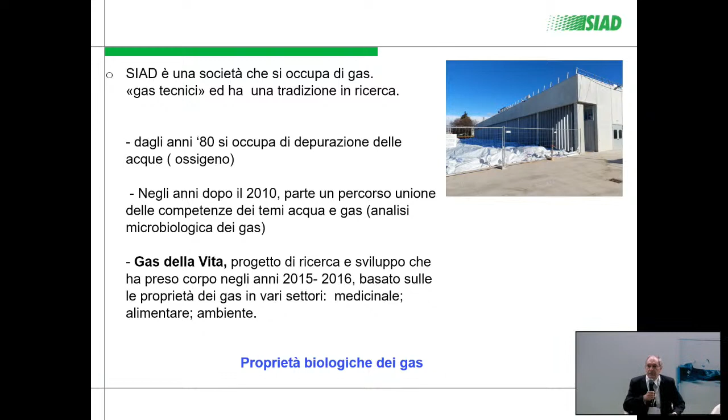H2S. And if life in its biological portion produces these gases, these gases are also capable of reversing the biological process to our benefit. There are other gases with a very important biological effect also on man. In 2015, 2016, SIAD started with a great investment to bring this concept of a gas of life into the fields of food, medicine, and environment. The environment sector is the one that concerns us today.

So expressing this concept, a lot of things may come to your mind, but I mentioned four gases, not only oxygen. If we were able to imbalance these gases in the biological process, apparently we are able to modify the bacteria to our benefit. So the biological process may not be the same as the one we know now. This is a research process that SIAD has started and will continue.

And let's talk about the holistic approach. That is a term that has been abused, meaning let's deal with everything, combining competences. But let's face it this way. I remember I chose to introduce this holistic term about 40 years ago, or even before. I had a big volume to read, the acts of the Vienna process.

The afternoon was very hot, and I decided to read even the premise, the introduction. The introduction had been written by a scientist and philosopher. And the first words were: these are the acts of the process of Vienna, talking about wastewater purification technologies. Are you sure you want to purify wastewaters?

And there was also the concept of the various systems, of the various environments. If you do something, you may pass from gas to liquid, and vice versa. Are you ready to do that? That premise was quite impactful, and you would not expect it in the acts of a congress. But this premise remained in my mind, combining the first slide with this one we had the opportunity to hear.

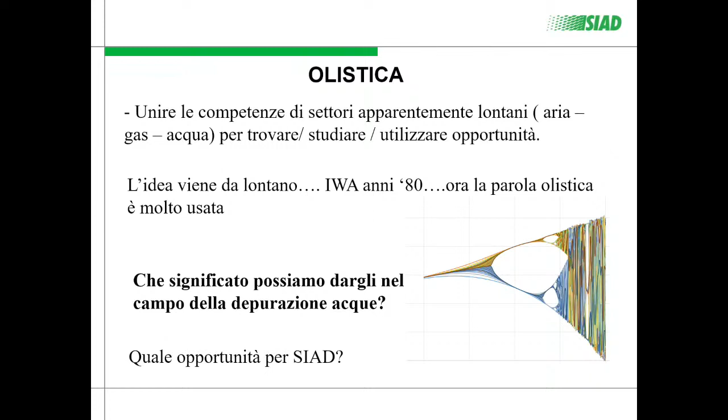So, combining the first slide to the second slide, we have this big opportunity to do it with PerFORM Water. When I was told by Mrs. Bazinet on the occasion of this big project, PerFORM Water, I said, well, that's good, but we can do it with a great effort. Following this idea, not only wastewater purification, but let's consider it as a whole with the strengths we have. And then 5 topics came out, and then these were reduced to 4.

That was a big effort for SIAD, but we decided to do it all the same. And we started this pathway in PerFORM Water that you will hear this afternoon. These concepts went along, and we all know that we talk about environmental footprint, environmental impact, but anytime I hear about them, they are smaller indeed, because it is the environmental impact of the wastewater treatment plant, of the building, and it's quite difficult to get out of this field.

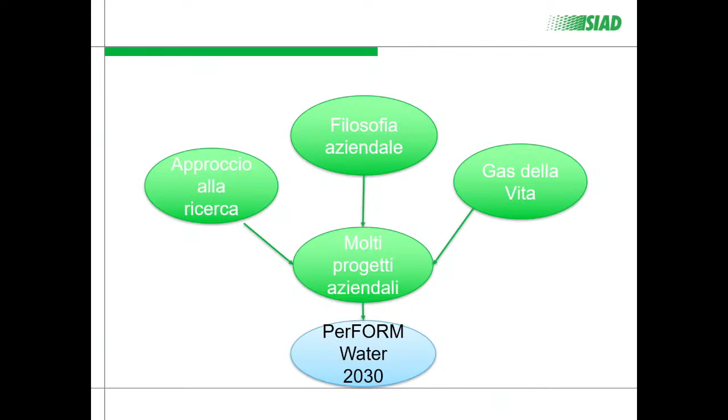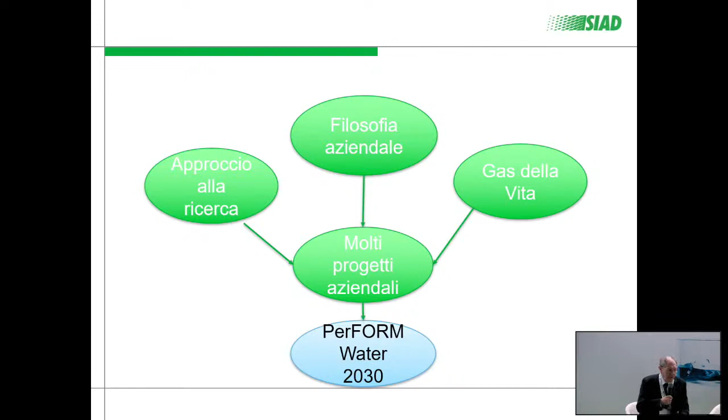And among the various company projects, we will focus on PerFORM Water, because there are many other company projects. PerFORM Water could start with the techniques, meaning having just a technical approach, so to see how much oxygen differs in the biological process tank. But we have to make an effort in not focusing on the usual issues and topics that are, of course, important.

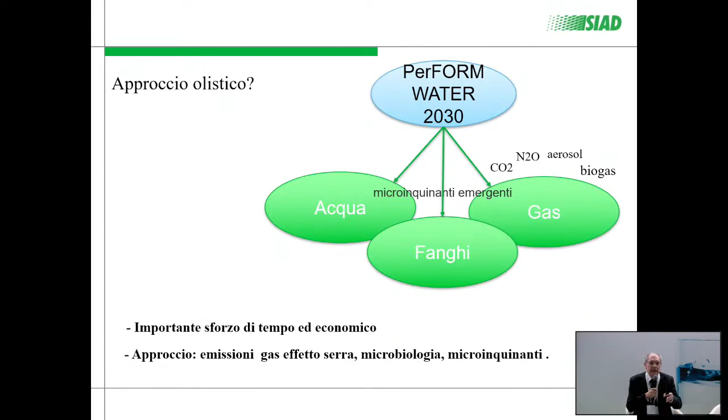The wastewater treatment plant also includes greenhouse gases, about 100 kilos per day. Is it something on which we can intervene or not? So everyone will then give their own answers. But today and tomorrow, this kind of data will be presented to you. So to measure a parameter does not mean that there must be something wrong. It's just measuring from a scientific point of view. So I want to know it, and then I will evaluate whether it's important or not. It's not that I measure because I know there is a problem there, but I measure it because I don't know very much about that parameter.

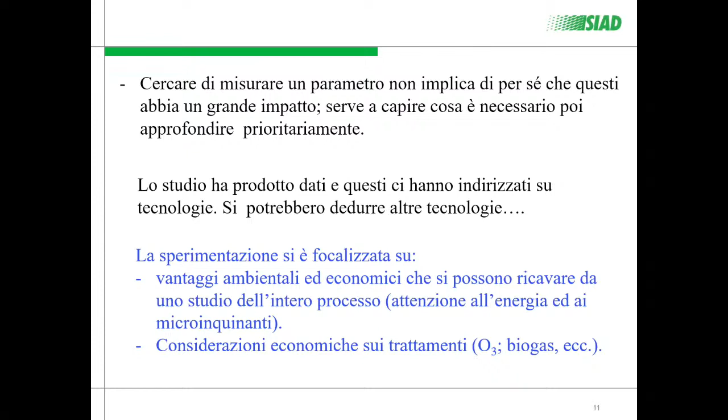So did we do philosophy with PerFORM Water? Not so much, because we have obtained quite important results. And also with respect to energy, the overall energy of the system, the holistic energy of the system, which remains a guiding parameter. So if you have energy that you may use in a favorable way, your process will be successful. Whereas if energy is unfavorable in your process, but you're able to do it because you have the funds, that could be good for 2 or 3 years, but then it's going to die out. It's going to finish.

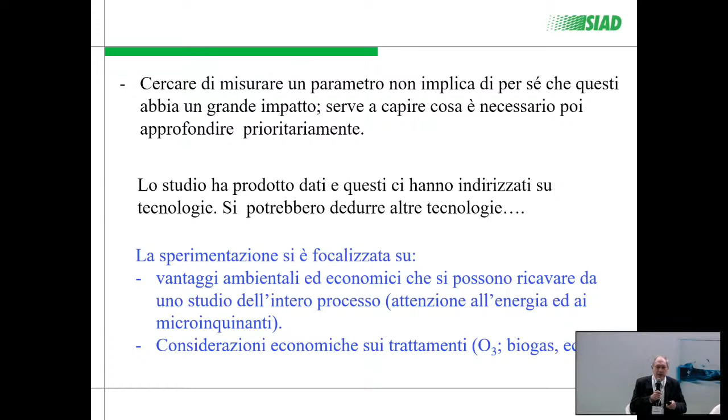So holistic is a concept that we should maintain throughout the processes. And of course, those who will read 384 pages of those European Commission guidelines may start understanding, fully being aware of these aspects. The real energy impact of your company will then be known to you.

At this point, I finish, and I just would like to remind you the concept of gas of life and the fact that PerFORM Water has been a big project, not only for SIAD, but as a whole, because also in the initial edition, it was an integrated project. Integrated means even more integrated now, but PerFORM Water went towards the right direction. We just need to be brave enough or to be willing to widen it.

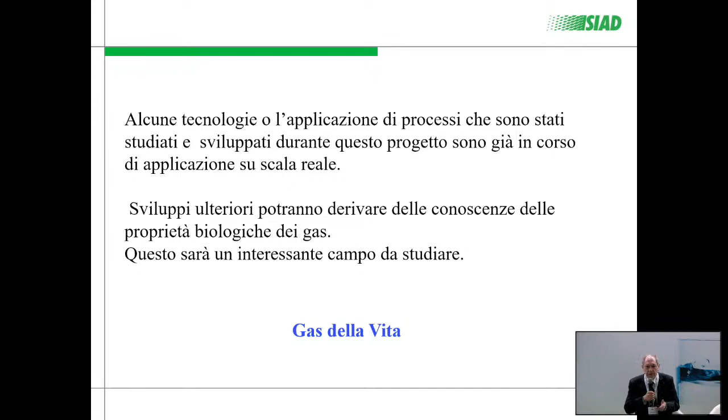And this morning we have heard about circular economy. And an interesting communication is this, that circular is not painless, because circular energy actually moves energy from upward to downward, moving activities and money. And so what becomes more important is indeed the companies located downhill rather than uphill. So it is like a transfer of energy.

So the word energy comes about again, but we need to know what this transfer is about. So the big company at the top of the supply chain may not be so powerful anymore, because the power will be transferred to downhill companies. And then let's consider the definition of gas of life, but also in wastewater purification, gas of life means gas having an impact on our life, on the biological composition of wastewaters in all their parts.

And then I leave the floor to following presenters who will tell us about what we have obtained. So no more philosophy so far, but the direction should be fully understood, and why SIAD has started PerFORM Water with such a big effort, covering 3 fields and not only one. I hope I conveyed this message to you.

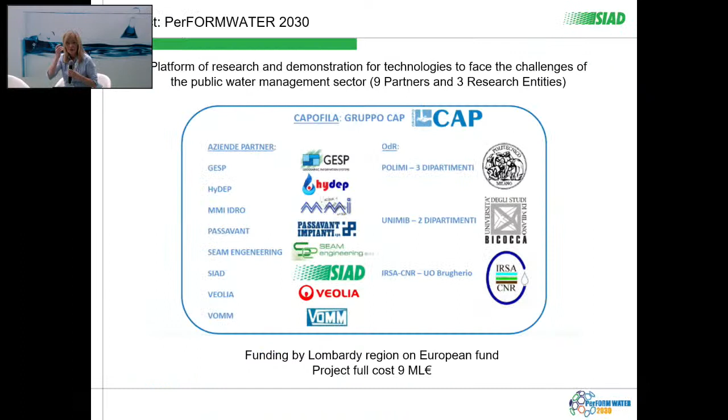So this slide lists the partners taking part in PerFORM Water. One is the Gruppo Cap that this morning was involved in presenting the whole project. We play a small part in the whole project. 3 research institutes, IRSA, the 2 universities, one of them being Bicocca University.

We couldn't cooperate with them. We cooperated with Politecnico because it is the scientific reference for the project, but we also carried out field tests and experiments. So PerFORM Water is a research and demonstration platform for technologies aimed at facing the challenges of the public water management sector. The project has been funded by Lombardy authorities and EU authorities, and the financing amounted to approximately 9 million euros.

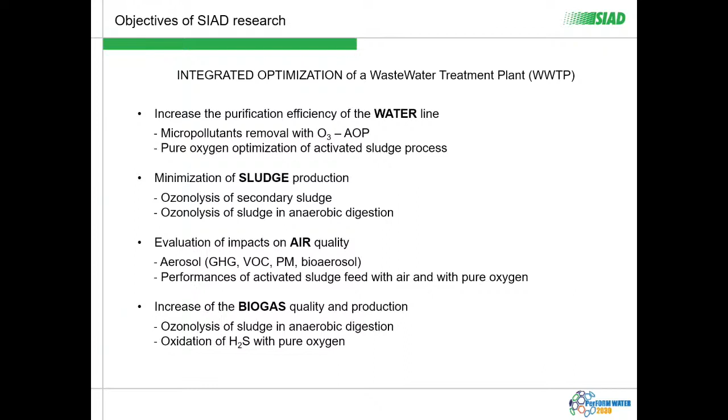As for the water line, we considered the possibility to optimize the treatment process with reference to micropollutants by using ozone. We assessed the oxygen purification process, so we're talking about activated sludge. And we also assessed the possibility to reduce the production of sludge, which is a tricky issue when it comes to plants. It also has economic consequences.

We analyzed 2 processes of ozonolysis on activated sludge with pure oxygen, and the other process in the anaerobic digestion phase. So one on the water line and one on the sludge line.

Another topic that offered a lot of challenges was to assess different processes of pollutant removal from the viewpoint of the impact on the surrounding environment. So we heard about this topic during the morning session, and sometimes we did not agree totally on this.

Assessment of air quality was only done by assessing aerosol until some years ago. So the analysis was carried out in the surrounding areas, the areas surrounding the plants.

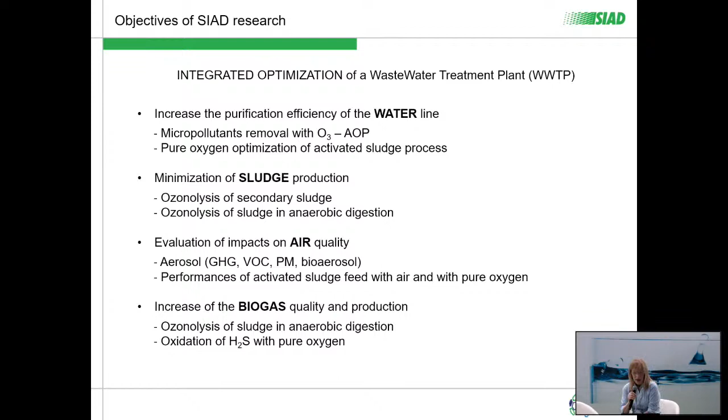This constitutes a challenge to assess the overall emissions, aerosol emissions produced by water treatment plants, not only from the biological department, so we consider the aerosol, VOC, and other gas emissions. So we tried to do this by assessing the diversified evaluation of plants like the one we worked in, compared to oxygen pure-fed tanks where there's no excess nitrogen component.

As for anaerobic digestion, since the objective was to reduce sludge production, we wondered how we could reduce it by incrementing and increasing the biogas yield and improving the biogas quality. This relates to the second topic I've mentioned, the reduction of sludge.

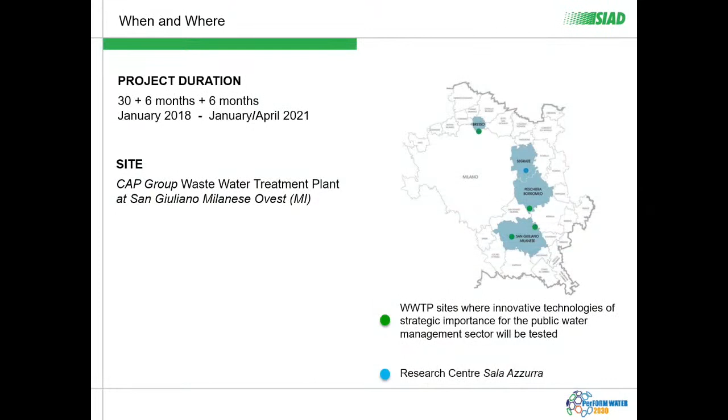We have carried out this activity in the plants made available for us, different plants, the ones you can see on this map, the green ones. The plant we worked in is located in San Giuliano Milanese West, and it has lasted for 4 years, quite a long period.

So we indicate 30 plus 6 plus 6. The first 6-month period derives from the fact that many partners asked to continue some projects, some activities, because some of them were late at the beginning, delayed because of problems that were later on solved. But in any case, the schedule was a little bit delayed.

The second 6-month period was caused by the pandemic period that slowed down the activities and also changed some conditions in comparison with the start of the project. So you can see the image of the plant I've just mentioned, an aerial view.

The different arrows show the different spots, different areas of the plant we have worked in. I'm not going too much into detail in this, but this gives you an overview of the different sectors and processes we worked in.

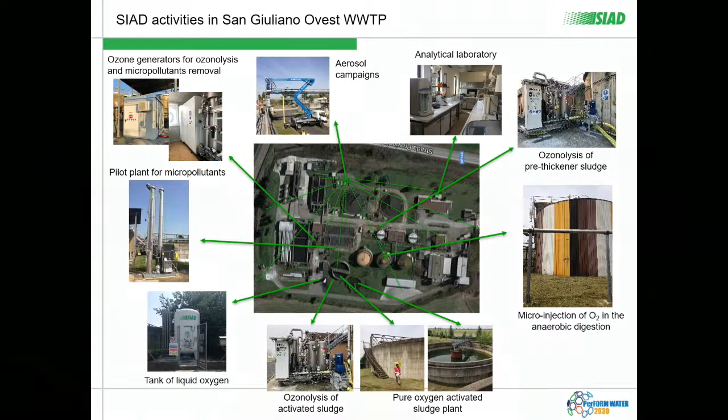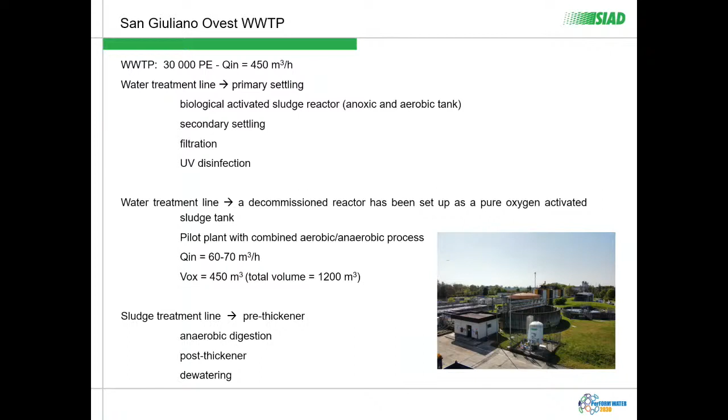I want now to thank CAP Group, not just because they supported us so well, but also because they made a laboratory available in the plant, and this was very useful because it enabled us to work directly in the plant. This was really helpful because in some sample harvesting campaigns, we were able to analyze the samples right there. So this facilitated the analysis campaign.

You see that the flow rate equals to 30,000 citizen equivalent of the biological activity sludge reactor, anoxic and aerobic tank. This is for the primary settling, and the secondary settling, and tertiary. We have filtration and UV disinfection.

As for the sludge treatment line, we have a pre-thickener, anaerobic digestion, post-thickener, and dewatering. And in the middle, there is a part related to the revamping of a tank that hadn't been used for years. It was made available for us to create the pilot scale plant, fueled and fed by activated sludge using pure oxygen.

We would treat a part of the incoming water, 450 cubic meters, and we would treat 70 cubic meters per hour, even though the output was not directed to the final receptor, but sent back to the plant, because we were not allowed to discharge the output water. The request was to reach the highest and best quality of results, because we had to compare these results with the real plant, so the performance had to be comparable to the one of the real plant.

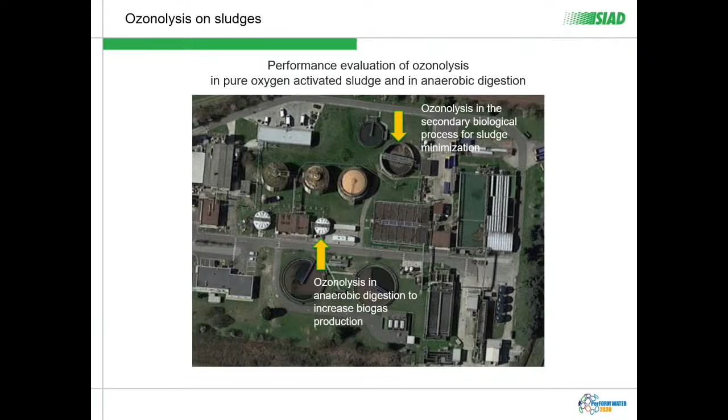Now, I would like to offer you a brief overview, some food for thought, so that you can see the four topics, and the other speakers will provide you with more details.

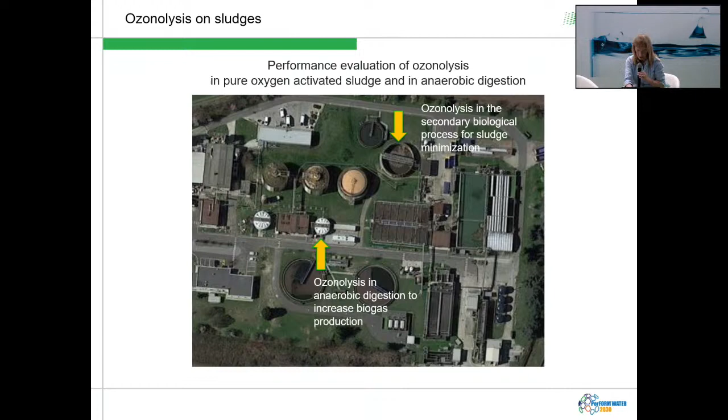So we evaluated the ozone performance in reducing sludge on the secondary and on anaerobic digestion. This speech and the following one - I added this part here because this gives me the chance to provide some information for tomorrow's participants who are not here today, as for using ozone to reduce sludge yields in the secondary process.

Based on activated sludges, you see the experimental plan results, and details in red and green color are indicated. Different periods when the plant used and didn't use the ozone - so before and after. The plan was to have 2 cycles for conditions, but it was not possible.

The other important thing was to evaluate the plant functioning in different temperatures, especially when it comes to nitrification, because it's very sensitive to temperature changes. So we needed to evaluate the effect of ozonolysis on nitrification in winter and in summertime.

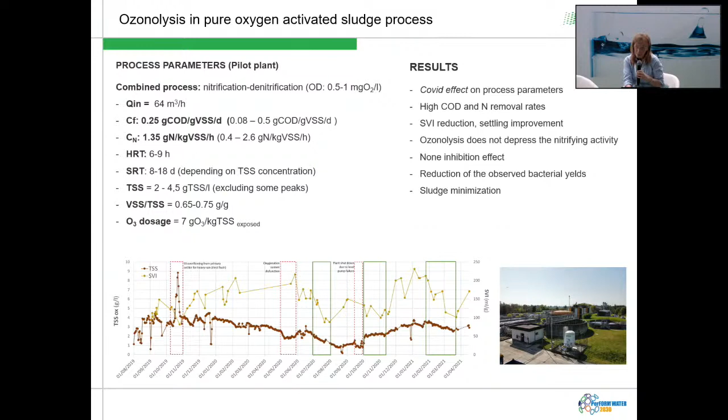We evaluated, taking different viewpoints, that ozone could not influence the biological process, not interfering with the regular standard biological activity, with particular reference to nitrification. So overall, no inhibition effect was recorded. We're not saying something unoriginal, that the cellular growth rate was lower - it was so, and we also attained the reduction of sludge production.

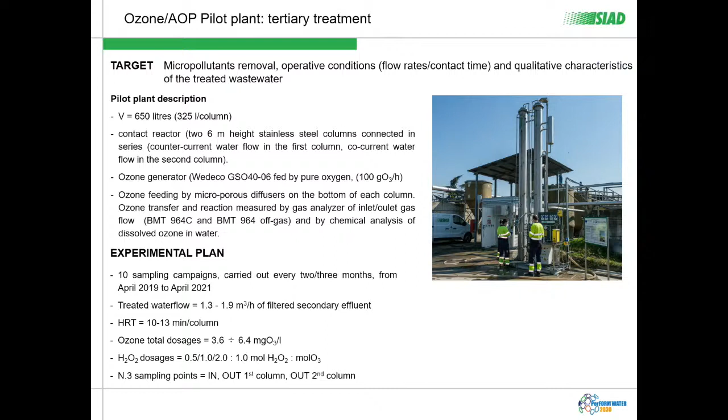As for the tertiary treatment with ozone to remove micropollutants, we designed, installed and managed this pilot plant, 2 columns, 6 meters high, overall volume 650 liters, 325 liters per column. We used pure oxygen from the bottom with a porous disc.

This activity lasted for over 1 year, 10 sampling campaigns lasting 2 or 3 days in a row in the operating plant, and the treated water was the one coming from the filtering.

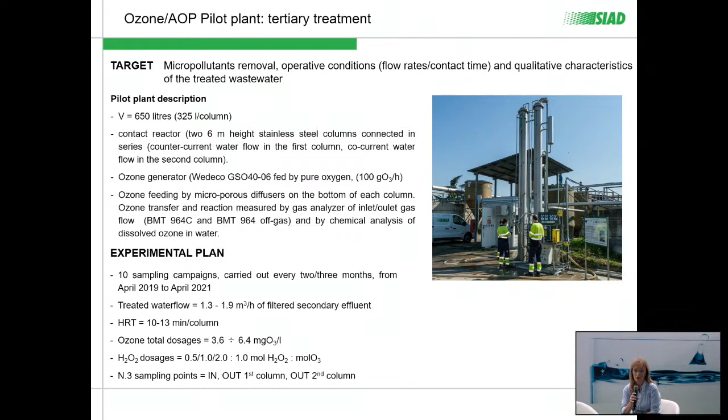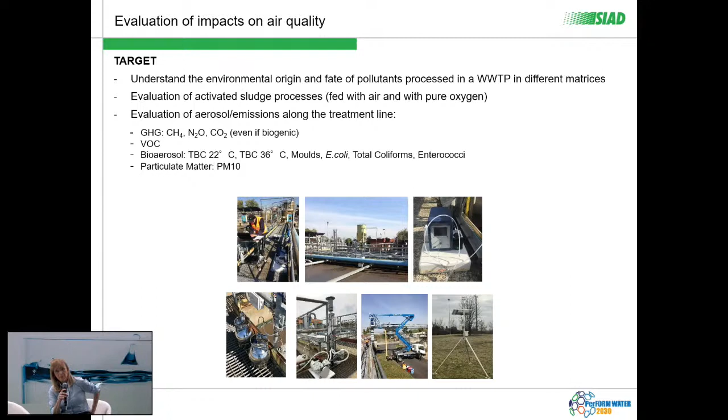As for the evaluation of the impact in terms of aerosols of the water treatment process, I have mentioned the parameters we considered to try and achieve an overall balance. We didn't succeed completely because we achieved a lot of results, but also many doubts and questions still to be answered. But this is what research is about: finding confirmation of hypotheses, but also continuing experiments and research.

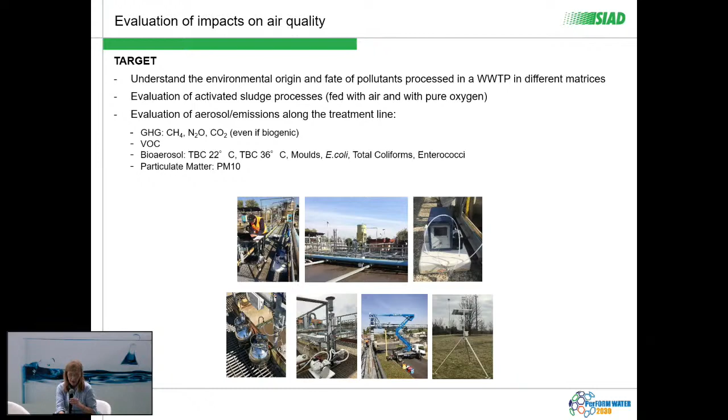There are some pictures in this slide representing the sampling system we have used at the moment. The experimental plan may seem difficult to describe because it seems boring to say that we have harvested samples at the beginning of the process, at the end. I'm not going to describe all the biological, oxygen biological process and so on and so forth, but

I had the chance to talk to partners during the lunch break. We said that the volume, the amount of results we have attained is really extraordinary, and data still need to be processed and evaluated, and most of the activities have been completed, but it is also true that results can be interpreted in many ways from different viewpoints.

So one individual result can bring about many other results if seen from different viewpoints. So this means that we are going to continue our activity, our research.

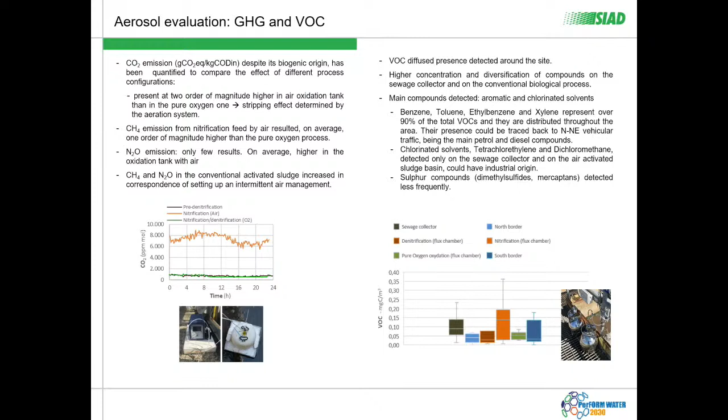I would say the pivotal point referred to nitrous oxide and methane in alternated cycles of oxidation. From a certain viewpoint, in an air-fed oxidation tank, we provide oxygen to a certain level, then oxidation stops and the oxygen level goes down to a minimum set point, and then it starts again.

During this phase, anoxic phases develop, favoring the release of, for instance, greenhouse gases. So maybe we are talking about meaningful or non-meaningful mass figures. What's their value?

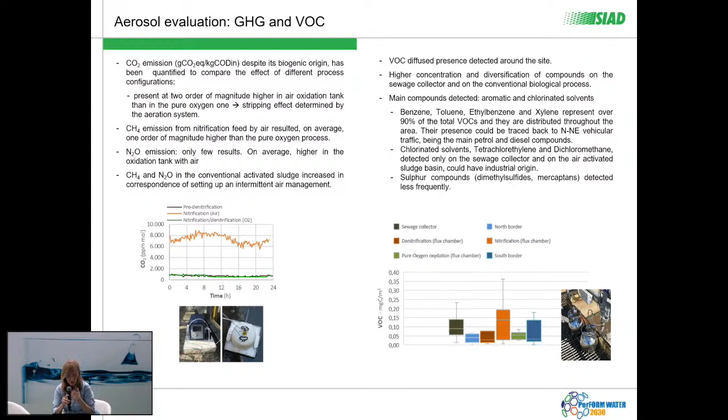As for the biological tanks, the evaluation of greenhouse gases was made using a flux chamber to funnel the outgoing gases to evaluate their amount released in the air, as with the VOC. They come from the sewage collector, and to a lesser extent, the tanks.

We identified chloride-based pollutants, aromatic pollutants in different concentration levels that will be better described in tomorrow's presentation.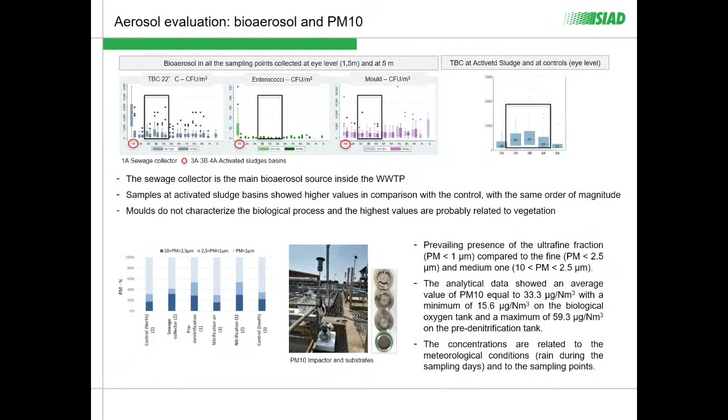As for the bioaerosol, we have evaluated different parameters, and something that was new to us in this project was to assess the presence of bioaerosol gases at man's height, but also in the atmosphere. We wanted to see whether these matters are still present at 5-meter height or not.

Obviously, the answer was it depends on the conditions: wind, the position, if it's sunny or not, so the conditions of the surrounding environment. I am smiling, but this is how things stand, this is exactly what happened. So we use different parameters for the bacterial count and pathogens.

The main evidence that emerged was that a critical point in the plant is the sewage collector, which can be anticipated, and the biological processing tanks showed results and values that can be found also in the literature, with small differences between oxygen, pure oxygen, and activated sludge tanks. The two blocks of right and left are the two control ones.

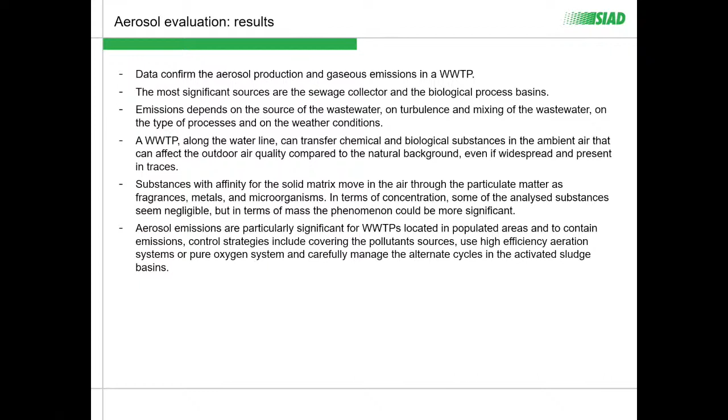and also the concentrations depended on the conditions, the weather when samples were taken, and in the particulate we identified the presence of a fragrance. So this is something worth noticing. And I have synthesized the results. This slide wraps up what I have said. So this is a synthesis of all of the activities.

Just to recap with some figures, the results of our activities on anaerobic digestion. You see also important figures. So you have the increase in biogas, which is quite important. Some are in real scale and some in lab scale, with sludge minimization and a significant reduction of H2S.

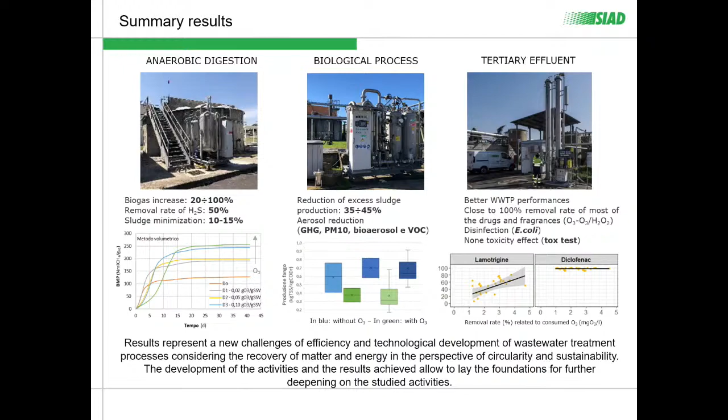With regard to the biological process, indeed the ozone releases allowed us to significantly reduce sludge production and the possibility of containing aerosol, with reduction of those four parameters. And concerning the tertiary effluent, for the reduction of micropollutants, ozone allowed us to obtain 100% removal rate of most contaminants. Some were ozone refractory, but it was possible to obtain higher yields with ozone, from 20 to 80, and something more with the implementation of

peroxide. And an important thing, with regard to ozone treatment and especially for tertiary effluent treatment, we evaluated the toxicity percentage. We said that this morning. Not all substances can be transformed into CO2 and water. For us, it's important to understand whether ozone treatment may lead to formation of undesired products that normally would not be taken into account. So we have faced this aspect, measured toxicity tests as required by the regulations, but also mutagenesis tests.

Then I really feel like thanking everybody, all the people who collaborated with us, all of the partners of our company and all of the colleagues. We also would like to remember our colleague Alessandro, who passed away last year. Thank you very much.

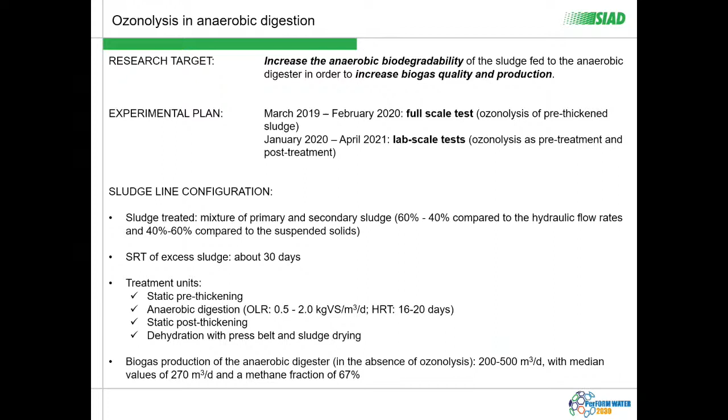So the San Giuliano West plant in the sludge line configuration treats a mixture of primary and secondary sludge, 60% primary and 40% secondary sludge as regards hydraulic flow rates, so 40 and 60 compared to the suspended solids content. And so the SRT of excess sludge is about 30 days. Treatment units were already presented by Eleonora. So pre-thickening, anaerobic digester, post-thickening, dehydration, and sludge drying.

So a note on the anaerobic digester. This was operated with a very variable load during testing, from 0.5 to 2 kilos of volatile solids per cubic meter per day, with an HRT from 16 to 20 days. The digestion plant, in the absence of ozonizers, would have median values, because the median is a more representative value, of about 300 cubic meters per day with a methane fraction of 67%.

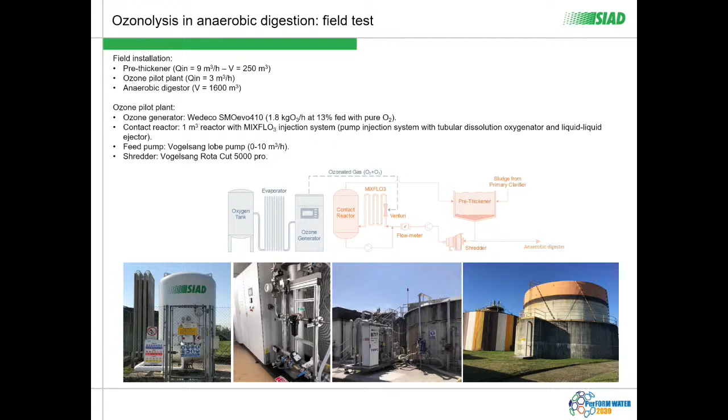So then the field test included the installation of a contact reactor next to the pre-thickener, and the sludge coming out of the pre-thickener was fed to the contact reactor and then to the thickener itself. Substantially, we created an internal recirculation in the pre-thickener, and in future we want to treat the blend, but in this phase we did not rely on the security of this, so we treated the sludge in the pre-thickener that was then fed to the anaerobic digester.

You see the various parts of the plant, pure oxygen feeding ozone generators, sending the gas to the contact reactor. There was a recirculation within the pre-thickener, and then the treated sludge was sent to the anaerobic digester.

So the characteristics of the sludge being treated, without dealing with individual figures, but just to tell you that sludge had a total solid content of 22 grams per liter with a total volatile fraction of 63%. Soluble COD was 300 milligrams per liter, and total organic nitrogen was 1,000 milligrams per liter, of which 35 were dissolved in the supernatant. The supernatant was detecting a content of volatile fatty acids of 352, and then protein and carbohydrates 3,000 and 7,000 milligrams per liter as a whole, but in the dissolved portion 5 milligrams per liter for carbohydrates and 75 milligrams per liter for proteins.

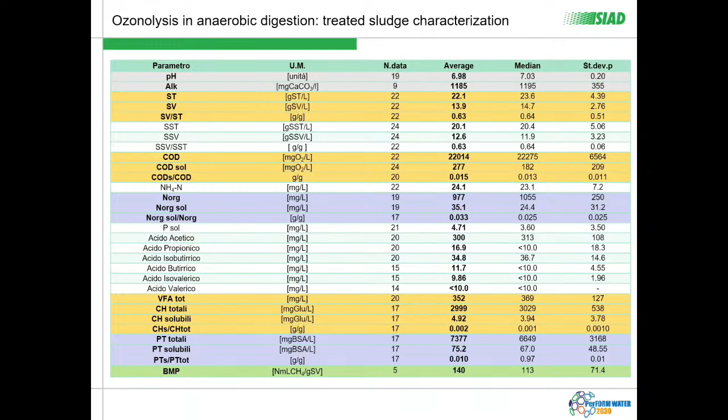Finally, in green, the BMP, that is a test measuring the biochemical methane potential of a sludge, expressed in milliliters of methane per gram of volatile solids. And the sludge at the entry of the pre-thickener had a value of 140 milliliters per gram. That is quite low, but very variable. The variation coefficient was equal to 50%. So it could be either 70 or 210.

So how much ozone have we dosed? If we refer to the gas flow rate to the pre-thickener, the dosed ozone was from 2 to 10 grams of ozone per kilogram of volatile solids. If we refer just to the contact reactor, where we treated a lower flow rate to the pre-thickener, this dosage changed from 10 to 40.

So from a certain point of view, having treated a lower portion allowed us to also evaluate the performances and yields at different dosages: a low dosage at the pre-thickener and another one calculated only at the contact reactor. So, something about the pre-thickener: the pre-thickener has a contact time of 1 day.

Arianna was telling us this morning that the disadvantageous element is that by treating that sludge, we actually give oxygen to the sludge, not only ozone. And this oxygen may determine the starting of aerobic processes, consuming substances you would like to keep for anaerobic digestion. So it is a kind of vicious cycle.

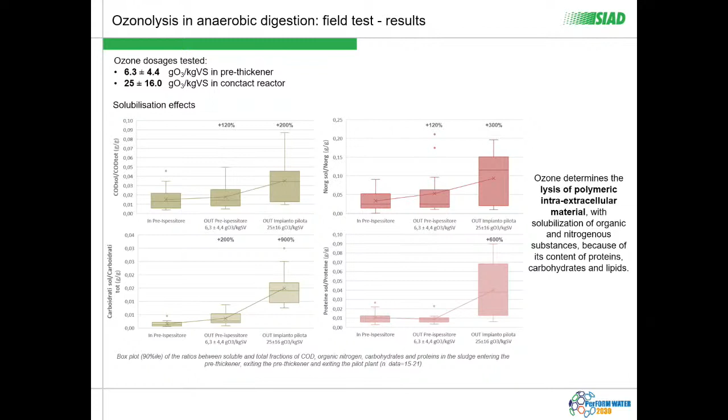In these graphs, we had to make a statistical analysis of data because sludge characteristics underwent a strong variability during testing. And during testing, we encountered several difficulties from an operational point of view and also with respect to the plants. We will see some pictures then, just to confirm that reality is much different from the lab scale. So full scale is different than lab scale. We have indeed perceived this.

From these diagrams, you see the pre-treatment chain: incoming into the pre-thickener, the outcome from the pre-thickener, and then the output from the pilot plant. So what does ozone do? It dissolves organic and nitrogen material and makes it available to the anaerobic treatment that occurs downstream. So the ozone's task is to make available a substance that otherwise would not be available.

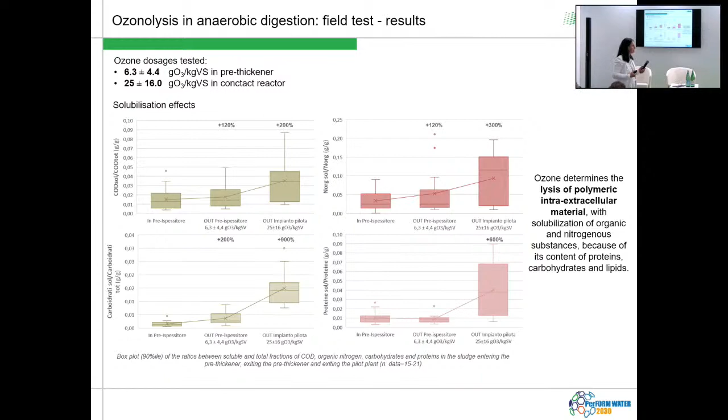In particular, what we see in the diagram on the top left is the increase in the dissolved fraction of COD. We had 370 milligrams per liter of dissolved COD, and now we have 500. For nitrogen, we had 1 to 3 times, so from about 40, we reached 120 milligrams per liter of dissolved nitrogen. But what is even more evident was the increase in carbohydrates, a 9 times increase of the dissolved fraction, and a 6 times increase of proteins.

So what did ozone do? The ozone actually lysed the polymeric content of the sludge consisting of carbohydrates and proteins. We have detected them as carbohydrates and proteins, but also as COD and organic nitrogen.

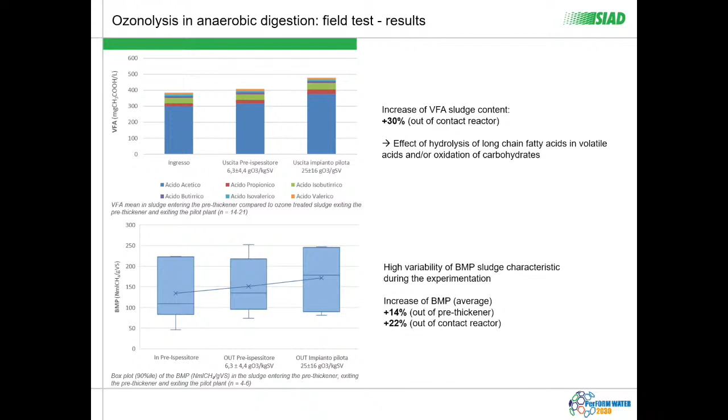So in addition to the dissolution of the organic nitrogen substance, there was also an increase of VFA content in the sludge, and consider that VFA indeed constitute the feed of the methane generation process, so methane is then produced from volatile fatty acids. So the ozone takes the place of a phase that otherwise would occur biologically and would produce this VFA useful for methane generation.

Why does it produce VFA? Because there is a hydrolysis of long chains of fatty acids that transforms them into VFA, or oxidation processes of carbohydrates, because carbohydrates, when they oxidize, indeed make this transformation.

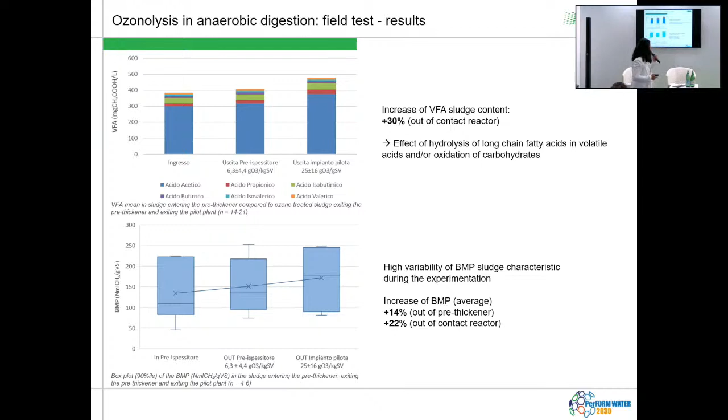Along the treatment chain, we have the methane generation characteristics of the sludge, and what we have seen is an increase by 14% with reference to the pre-thickener. You should consider the note I said, that 14% probably pays for a loss by aerobic oxidation, and 22% out of the contact reactor, where the dosage was higher, about 25 grams per kilogram of VS.

And the idea of installing at full scale was to be able to see the production of methane indeed in the gas meter, because so far we talked about lab tests, analysis, confirmation with the BMP, but we wanted to see an increase in the production of methane also in the gas meter.

We really had a lot of problems during testing, and it was difficult to have a long functioning period. We were able to do that over the last month, when the pilot plant operated continuously for 1 month. That was a retention period of the anaerobic digester.

But evaluating the effect of ozonolysis on the anaerobic digester was not possible from the data we collected, due to the variability of conditions and also due to the various issues we encountered. So a multivariate statistical analysis was carried out on the main components, where substantially all figures that have been collected have been subdivided into main components.

I'm giving the floor to Davide, who is going to describe the results of the lab scale tests, together with full-scale test. We carried out these lab scale tests aiming at confirming the results of the full-scale tests, and on the other side they aimed to identify the best ozone dosage for the substrates, and also to carry out an economic sustainability analysis. So the lab scale tests were carried out on the pre-thickened sludge and on the

digested sludge. For fresh sludge, we used net dosage from 20 to 140 grams, and for the digested sludge, 130 to 300. Tests were carried out on glass columns, and ozone was insufflated from the bottom, and we were able to measure what was consumed by the substrates.

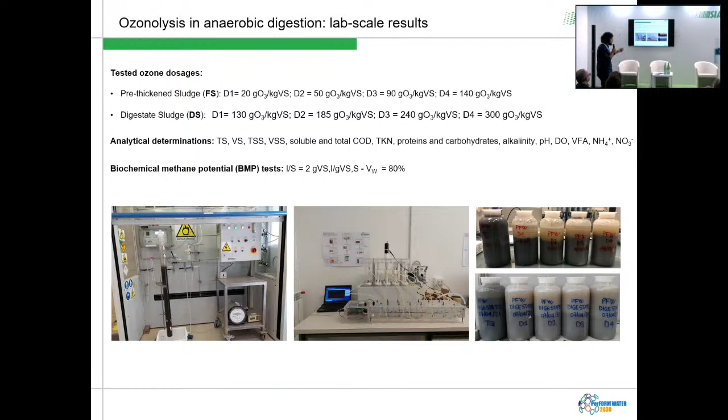We had the results you can see in this slide, and the BMP tests were carried out to evaluate the synergy between the two types of lab scale tests, to assess the outcomes on the potential of methane production and anaerobic activity. You can see the different results referring to the sludge and digestate, and you can see the different results we have obtained.

As Michela said, one of the possible disadvantages is the mineralization, chemical or biological mineralization of the biodegradable substance, which is mineralized and cannot be used to produce methane. In this case, results here refer to fresh sludge. You see the results of volatile solids and the other elements.

Mineralization didn't occur, so total and volatile solids did not change, but suspended and volatile solids reduced. This means that there was more solubility and better support to digestion. So this emerges also in the results obtained on COD and organic nitrogen. We have an increased TSS reduction from 7 to 13 and VSS reduction from 9 to 16.

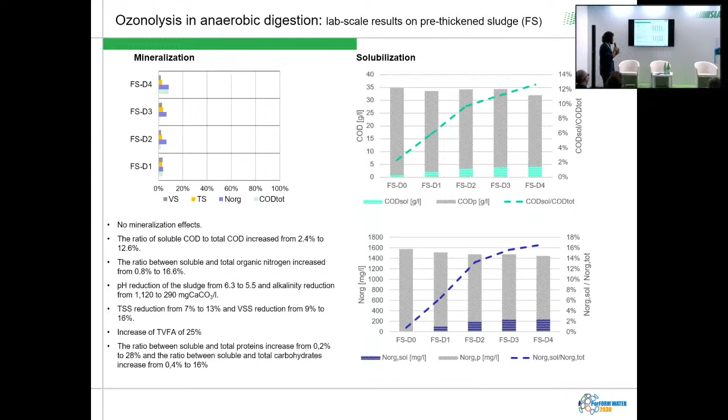So also on a lab scale, in a different fractionation of COD, we have observed an increment of VFA by 25%, representing the last element of the anaerobic degradation chain that is used to produce methane. And there was a considerable increase of soluble and total proteins. So the results in lab scale were similar to those obtained in full scale.

As for BMP on the sludge, for all the ozone dosages, there was an increment of methane production potential that reached from 38 to 74%. So this is related to an increase of anaerobic degradability. So this proves that after being treated with ozone, the organic matter is more available for anaerobic bacteria.

We carried out analysis of degradation kinetics to measure the time to reach 50% of BMP. We observed that for low dosages, the variation is not significant. There is a variation for the highest dosage. When you see the curve of BMP, the one in dark green, you see that there is a delay phase

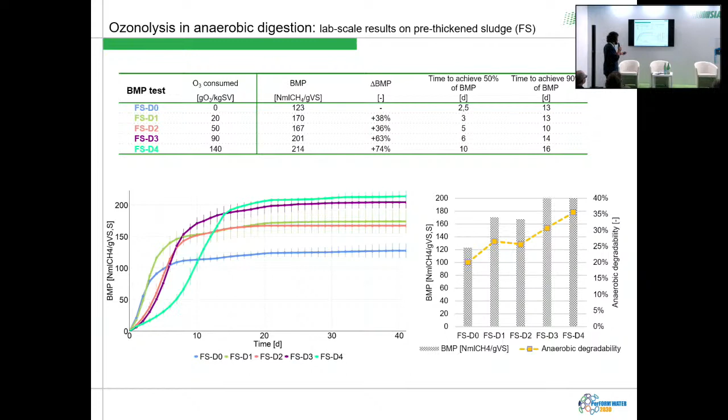at the beginning, which could be provoked by the effect of ozone on anaerobic biomass or the presence of residual oxygen. So there could have been an initial inhibition phase, whose effects are eliminated over time. And the potential of methane production definitely increases.

As for the digestate sludge, as said before, higher ozone dosages were used compared to those used for fresh sludge. This implied mild mineralization of volatile solids. The effects of solubilization were even more evident. The ratio of soluble COD to total COD increased from 1 to 21%, and the ratio between soluble and total organic nitrogen increased from 2 to 27%.

VFA increased by 275%, and similarly, the soluble proteins and carbohydrates increased. We observed a reduction in alkalinity. As Engineer Catenacci said, this is a very important parameter when assessing the operation of a digester. Probably this is due to stripping of CO2 or nitrification. This is an element that has to be observed and taken into consideration.

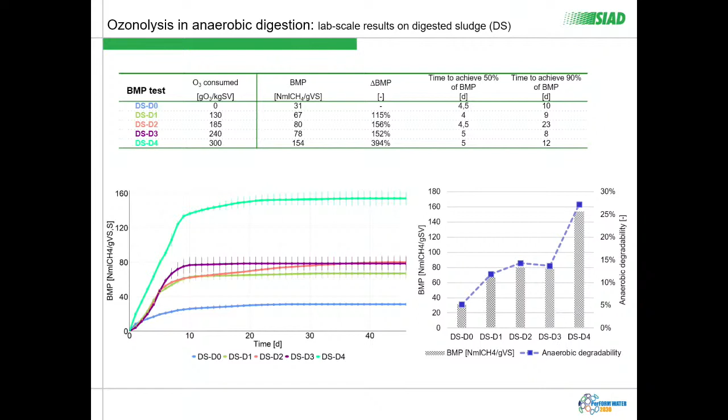As for the BMP test on digestate sludge, we see increases from 115.3% to 394% of the methane production potential, but these results need to be related to the type of substrate that was analyzed, because of the residual anaerobic degradability of the sludge coming out of the reactor. But anyway, the maximum ozone dosage was able to increase this by far. And there was, as you can see in the graph, no delay phase at the beginning.

The lab tests supporting the full-scale experimentation proved to be valuable and reliable, because we observed the same trends in full scale, and these are very good. They represent a very good tool to analyze ozone use from the viewpoint of effectiveness, but also in terms of economic and environmental sustainability.

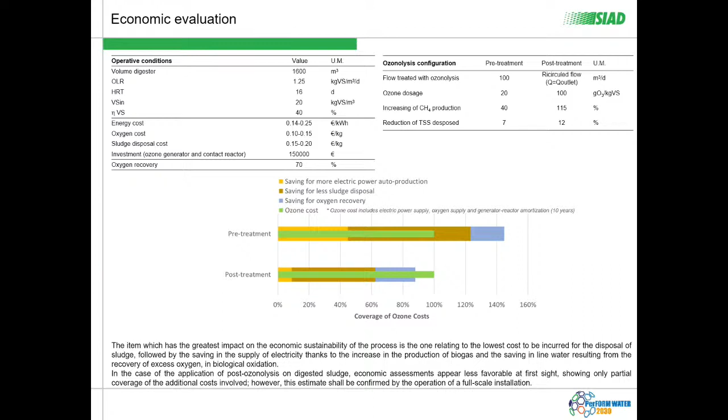Then we have a large share corresponding to 80% that represents the saving from reducing sludge removal. In lab tests, we noticed that we have 10% lower production of sludge, which costs 180 euros per ton. So this means a lot of money is saved by not having to dispose of this sludge.

We can also add one share if we recover oxygen that is not used. Extra oxygen from ozonolysis can be sent to the oxygen or air-fed plant, representing a sort of saving also from this viewpoint. Overall, the ozonolysis process can attain a coverage of 150% of its own cost.

In the pre-treatment configuration, when it comes to post-treatment, meaning treating the sludge coming out of the digester or recycled sludge, the compensation of cost may not occur, but it has to be evaluated in relation to the transfer technologies used in the whole process. So from the cost analysis, it appears less cost effective.

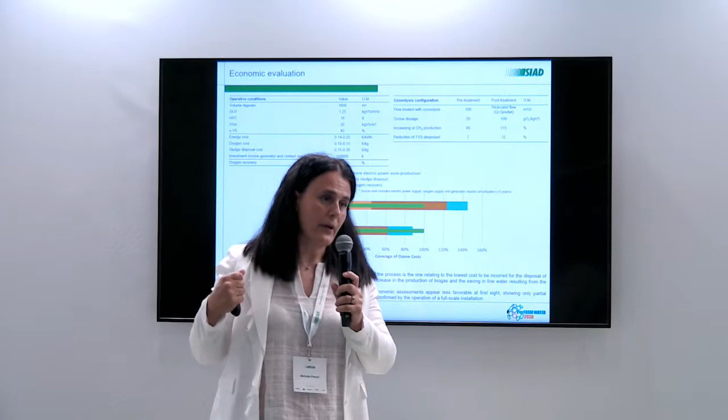Why? Because when we pre-treat, we emphasize an intrinsic characteristic of sludge, since sludge is prone to purification, and we make it available for this. In post-treatment, we are working on already degraded sludge, so it's difficult to get an advantage; we need to work more for that. From this viewpoint, post-treatment may offer some operational advantages, because the sludge is definitely easier to work with compared to the pre-treated one.

Let's have a look at this. This is what comes into the digester. It was hard to use the plant in a continuous cycle, because the sludge matrix is characterized by coarse material, many other matters and substances, so it's a more demanding operation in time terms. Whereas the post-treated phase allows us to work with more fluid matter. So these are the pros and cons to balance when calculating the advantages, also the economic ones.

In conclusion, we have been updating the literature. Examples of full-scale applications are definitely rare; we actually found only one in Italy, as Federico was saying. This was really a training opportunity for us, showing us how we can approach this type of treatment. It highlighted the results that can be attained, confirmed by lab tests. This opens up the possibility to implement this solution, especially today when we face problems relating to the need for electric power and biogas. So it opens up many different types of applications.

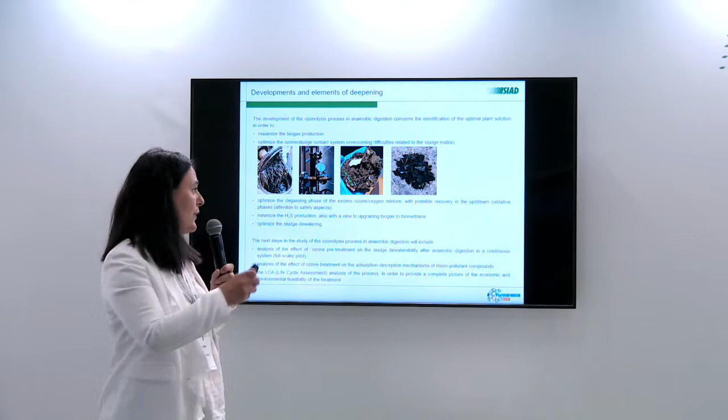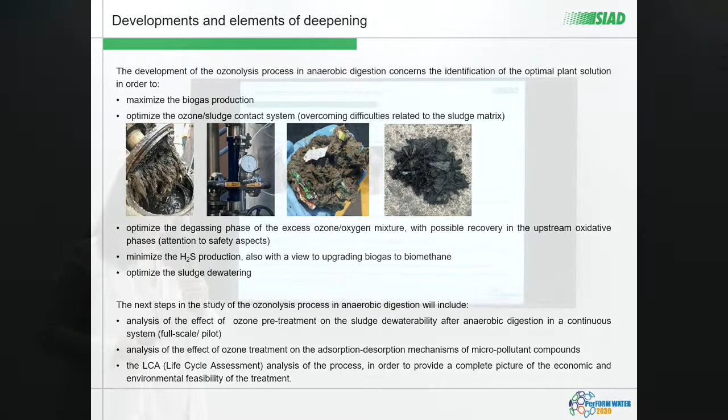But these are the aspects we need to evaluate. With the next activities we're going to carry out in cooperation with Politecnico, we'll also include a project we are developing with CAP. It's an EU-financed project, Horizon 2020. Thank you very much for your attention.

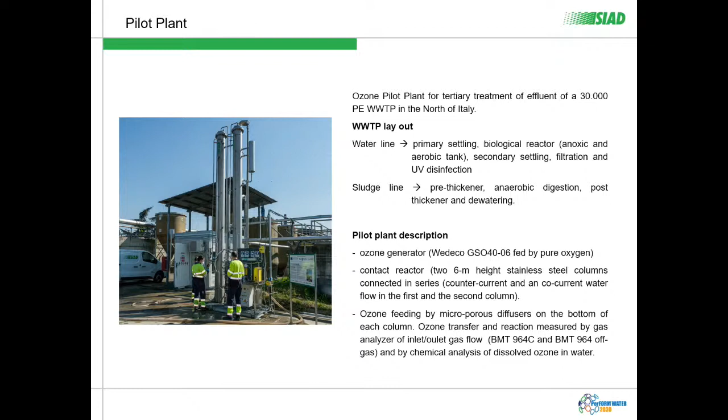We installed a pilot plant at San Giuliano, consisting of a double column with a useful volume of 650 liters, 325 per column, and an ozone generator GSO40 with 200 grams per hour, which we exploited very little because very low dosages were enough. The first column was in countercurrent with respect to the ozone flow.

There was a feed with porous plates on the bottom of the column, whereas the second column was in equi-current. We were controlling ozone production, the input and the output, to evaluate the yield of transfer, and we also analyzed the dissolved ozone in water in order to see only the reacted ozone.

This is the experimental plan. We made a series of analytical campaigns with only ozone treatment, evaluating retention times, especially from 10 to 15 minutes per column, so 20 to 30 minutes in the pilot plant, and then final tests with AOP and ozone plus hydrogen peroxide, because certain compounds were refractory to ozone treatment alone. Each test lasted about 4 hours.

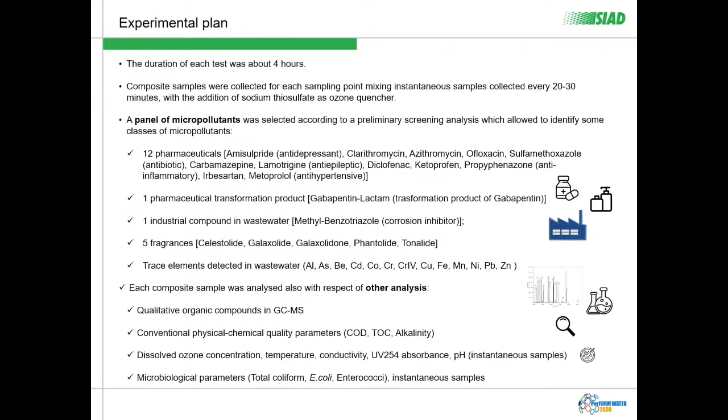Other analyses were made, especially gas chromatography mass spectrometry, to evaluate the organic composition of the wastewater in the various treatment phases, along with more conventional analysis: COD, TOC, and alkalinity, then dissolved ozone concentration, temperature, conductivity, and UV254, which is an indicator of organic substances containing carbon double bonds.

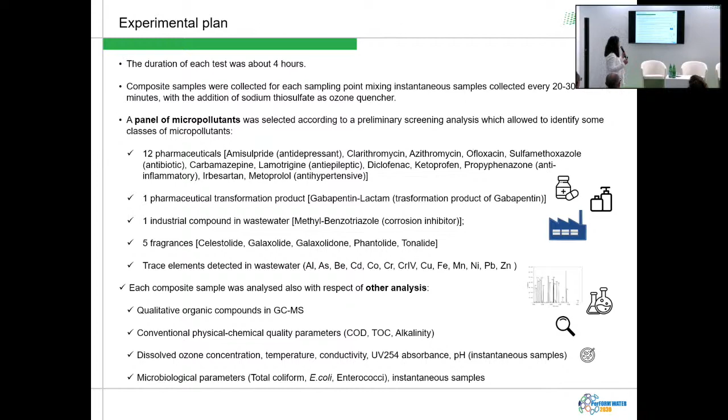And then also the disinfection effect of the process through microbiological parameters such as total coliform, Escherichia coli, and Enterococcus.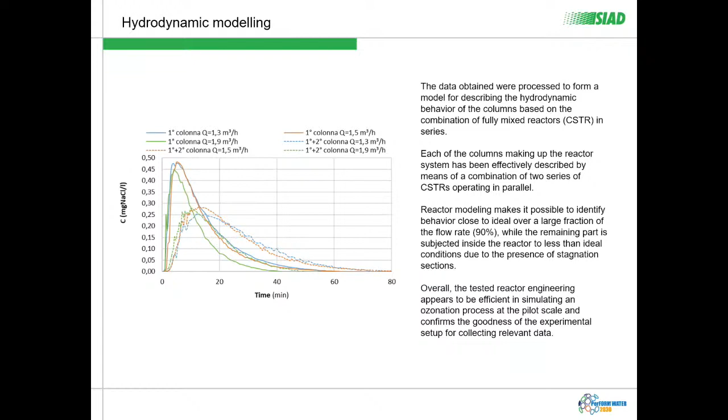Hydrodynamic modeling was also performed for the pilot plant with a co-tracer test, in particular sodium chloride, and from the analysis we saw that the pilot plant consisted of 90% completely mixed model, which confirmed that the samples we took were representative of the process itself.

Here you see the analyses made at the input and output of the plant. The process with ozone determined a reduction by 20% to 30% of the organic content expressed as COD or TOC, a 40% reduction in the absorbance index at 254 nanometers, and a reduction of suspended substances, with TSS from 6 milligrams to 1 milligram per liter, along with simultaneous improvement of the organoleptic characteristics of the wastewater.

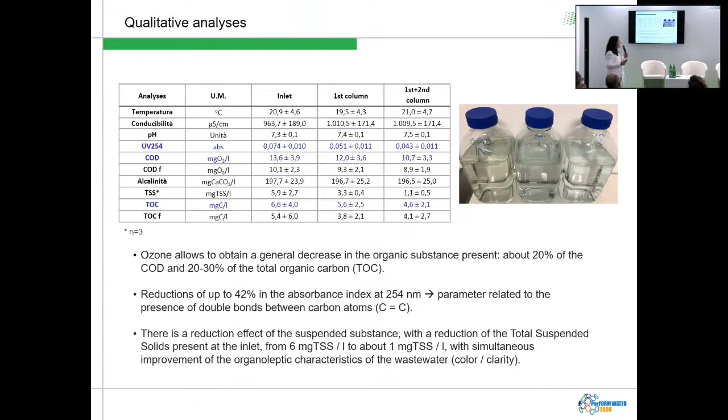You see in the picture the input, with the yellowish aspect of the wastewater, and at the end the wastewater was quite clear.

This is the characterization of micropollutants. You see the scale is nanograms per liter. The compound that is mostly present is methylbenzotriazole, which is a corrosion inhibitor.

Here you also see the fragrances, with 10 to the 4th for galaxolide, galaxolidone at 10 to the 3rd, tonalide at 10 to the 2nd, and celestolide or fantolide were not present or close to the limit of detection. And then we have the series of drugs.

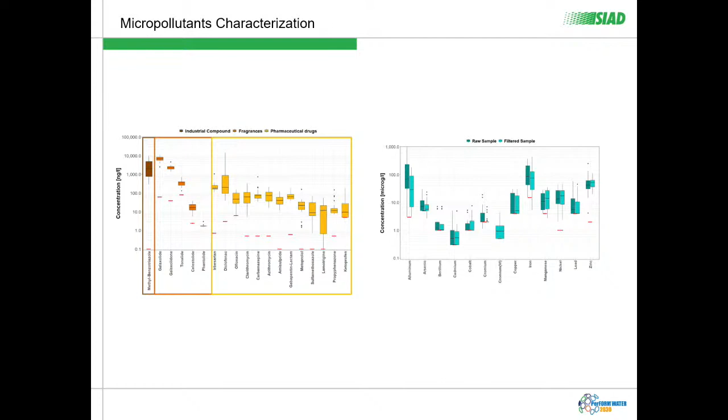Irbesartan, diclofenac, and ofloxacin were the most present, which are anti-inflammatories, antibiotics, and antiepileptics, from a concentration of 10 to the 3rd to 10 to the 1st. We are always talking about nanograms per liter, so very reduced concentrations.

Here we have the characterization in terms of metals. In this case the scale is in micrograms per liter. The concentrations change from metal to metal. We see aluminum, iron, and zinc, whereas those contained in traces were cadmium, cobalt, and chrome, which were also very close to the thresholds of detectability.

And here we see the results. In general, the tested operating conditions are the ones illustrated in the table, from 12 minutes retention time; these are average values.

We dosed 1.6 milligrams per liter of ozone in the first column, and 3 milligrams per liter of ozone in the entire plant, so very much reduced, with transfer yields of about 83% in the first column, reduced to 60% in the second because there was less organic substance to be removed, with an average of 75% over the entire plant.

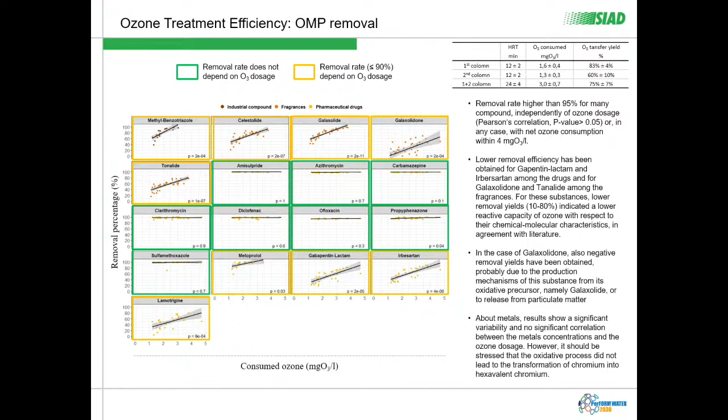Some compounds are an exception: galaxolidone, and also the gabapentin lactam, and the same for irbesartan. These three compounds were more refractory to ozone treatment. So facing this resistance, additional tests were performed for advanced oxidation with ozone and H2O2 in the second column.

In the first column, that is the first histogram of the 4 graphs, only ozone was dosed in the usual concentration, 1.25 milligrams per liter, whereas in the second column, different dosages of H2O2 were tested, expressed in mole to mole of H2O2, with a variation from 0 to 2. So increasing the H2O2 dosage, the removal rate of the compounds increased by 20% for gabapentin lactam, irbesartan, and tonalide.

Whereas what was very important was the increase in removal rate for galaxolidone, whose removal rate increased by 67%. The removal rate of galaxolidone in the first column was first negative, because in the first column part of the particulate material was dissolved in water, and galaxolidone is associated with sludge. So it is found on the particulate; in the first column it dissolved in water and we removed it in the second column. So its refractory nature is not because it doesn't react with ozone, but because it adhered to sludge and was then released in the water during treatment.

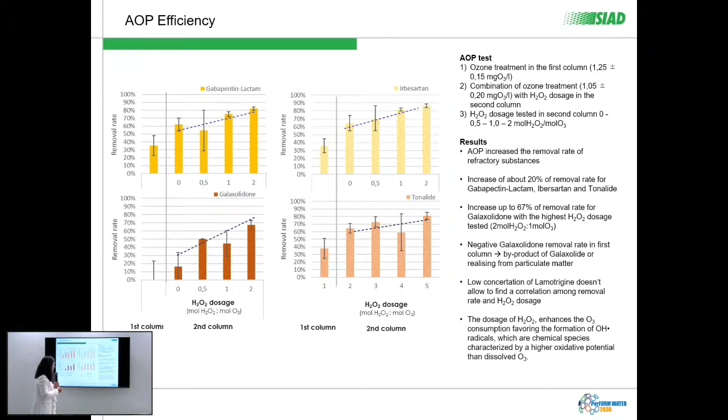Before giving the floor to Georgia, I'd like to say that we have carried out an economic cost analysis of the sustainability of the process. Considering the low dosages, the process is sustainable. In this case, the only saving element is represented again by the oxygen recovery. If we plan to recover the oxygen coming out of the columns, we can attain a 25% cost saving. So this is in line with the logic of circular economy and a holistic view of the process. And now it's your turn, Georgia, to evaluate the effect of ozone on organic composition.

We carried out qualitative analysis in gas chromatography-mass spectrometry, and the left graph refers to the families of compounds identified in the analysis for the inlet samples and the outlet of column 1 and column 2. The inlet sample is characterized by the presence of aromatic hydrocarbons. In the first column, the distribution of organic content changes, reducing the relative percentage of hydrocarbons with an increase in ketones and phenols. The second column shows a general reduction in the organic content as chromatographic area, with particular reference to the fraction of hydrocarbons and ketones.

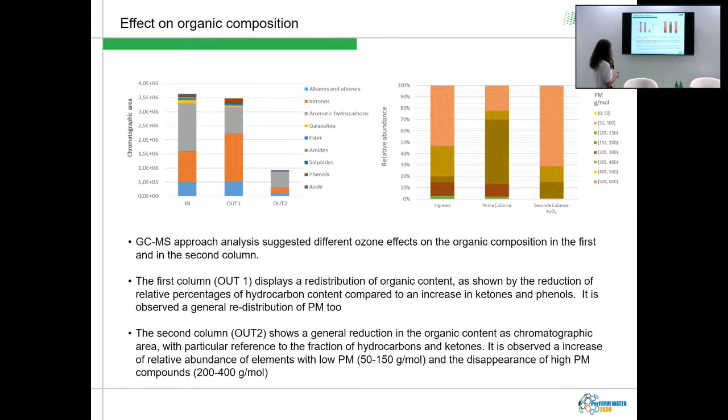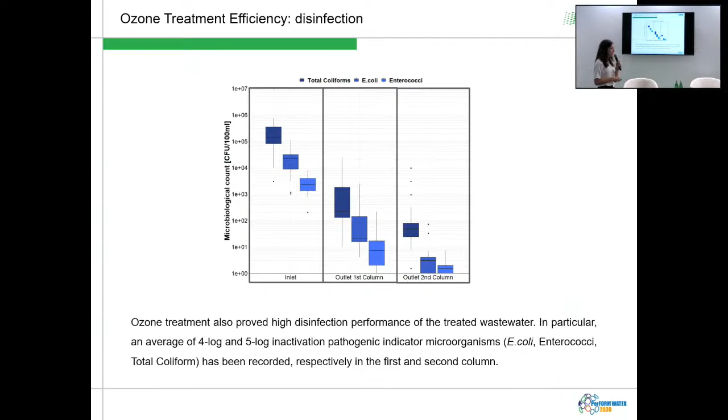In all sampling campaigns, the efficacy of the ozone treatment in terms of disinfection was assessed. We followed some pathogen indicator microorganisms: Escherichia coli, Enterococci, and total coliforms. As you can see in the graph, at the outlet of the first column we have an average 4 logarithm inactivation of microorganisms, and it's even higher at the outlet of the second column. It reaches 5 logarithmic units, which means that the disinfection is successful.

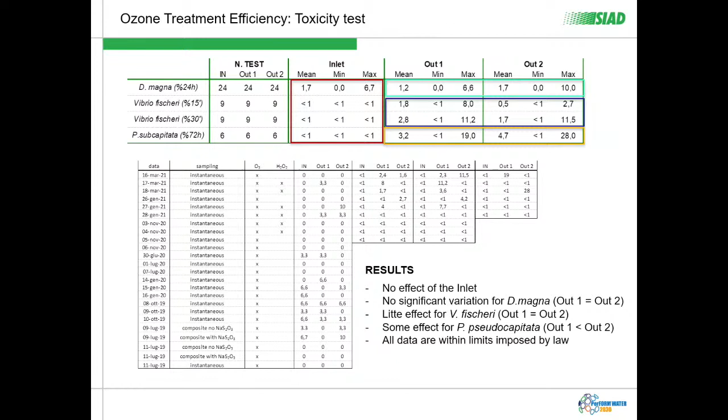Some toxicity tests have been carried out to evaluate any possible effects following the ozone treatment. We used Daphnia magna in 24 days of sampling, and tests with Vibrio fischeri in 9 days, and it turns out there is no significant variation for Daphnia magna, little effect for Vibrio fischeri, and some effect also for the chronic toxicity test with algae at the outlet of the second column. All data are within the limits imposed by the law.

In cooperation with Bologna University, in particular with Professor Fabbri, we evaluated the eco-compatibility of inlet and outlet water after being treated with ozone. We evaluated in particular the estrogenic potential. As for the estrogenic potential, we carried out the E-screen test on the sampling campaign January-March 2021. This makes it possible to identify estrogenic agents on breast cancer cells.

Well, there was the opposite, that the treatment helped to effectively reduce the presence of substances with estrogen-like activity, which were found on 3 inlet samples. So to confirm that this proliferation effect was due to molecules with estrogenic-like activity, a screen test has been carried out. And as you can see in the graph at the bottom with the fuchsia bars, with this inhibitor the proliferation potential is reduced, thus confirming that in inlet samples there were molecules having estrogenic-like activity that were degraded after being treated with ozone.

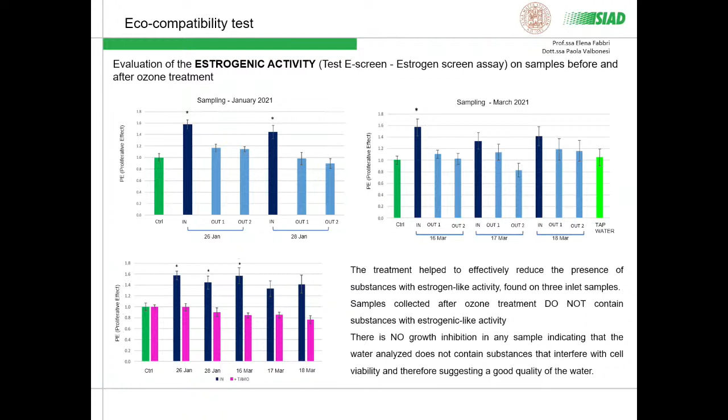No tested samples, inlet and outlet samples, showed a reduction in cellular vitality. This means that there are no potentially toxic compounds, especially after the ozone treatment, compounds that could have jeopardized the cell activity. We carried out also a test assessing the mutagenic potential of treated water before and after ozone treatment. This was called Micronucleus Test, using the same breast cancer cell line that makes it possible to measure the binucleated cells.

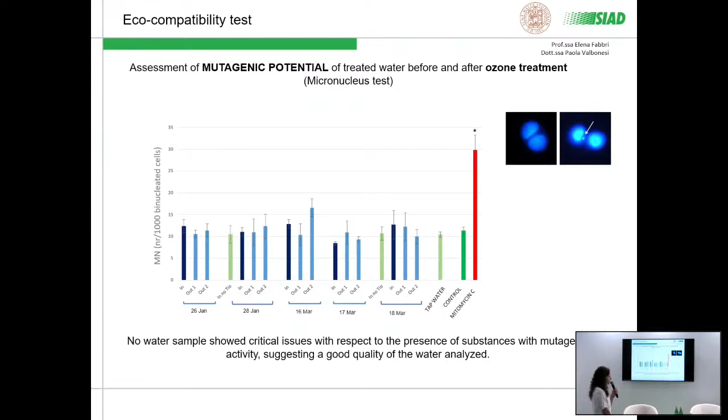They form spontaneously in cells also with no mutagenic agents. The test aims at determining a number of micronuclei significantly higher in those cells compared to control cells in pure water. In this case, the cell wouldn't be able to repair these flaws, thus originating some carcinogenetic effects. In no tested inlet and outlet samples was found a number of micronuclei different from the control sample. This suggests that there are no mutagenic substances in inlet and outlet samples after ozone treatment. So this makes us conclude that the produced water is of good quality.

I give the floor. Yeah, substantially concluding, the tested process resulted effective in removing micropollutants; in order to remove more refractory compounds, it is better to apply advanced oxidation process. The disinfection test and the analysis of bacterial counts confirmed that the ozone process indeed is quite effective, especially in tertiary effluent treatment, and toxicity tests demonstrated that in this specific case, ozone treatment did not cause an increase in acute toxicity or chronic toxicity, according to indeed the estrogen-like activity.

And as an additional note, this last test actually represents, in our opinion, the characteristic element on which we should focus, because to carry out an analysis of micropollutants at those concentrations is not only very expensive, it requires a lot of time, and in addition there is a difficulty in interpretation and execution of these analyses, also with some doubts about the reliability, because we're talking about nanograms. There's a great complexity in the analysis of these compounds. In the end, we just get a picture of whether there is or there isn't. So there might be a compound, a byproduct that we may not measure because we don't see it, but that could determine criticality at this discharge.

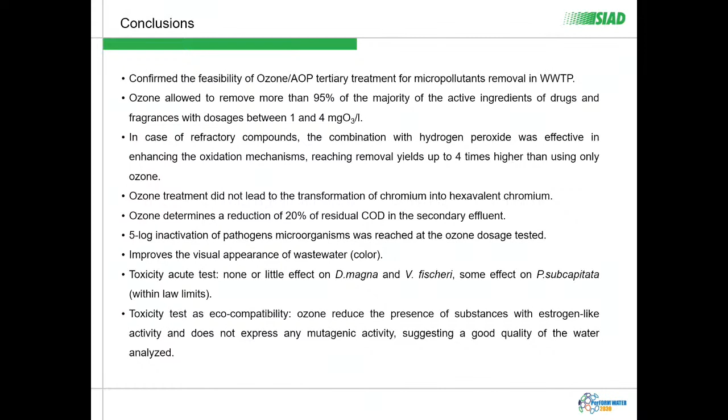The toxicity tests, especially those presented by Georgia, provide aggregate information about the quality of water and tell us whether the water is good or not, regardless of what is inside. But we are able to say that that water is compatible with the environment, and so with the receiving water basin, because it does not contain elements that may cause mutations. So this could be indeed a more complete point of view rather than a pure chemical analysis in itself. Thank you.

Very good. So the day has finished. Do you have any questions on this complex topic of micropollutants, emerging micropollutants, and toxicity? We have seen how the nanometric analysis of these pollutants is quite complex, and the residual toxicity of wastewaters is probably easier to be tackled.